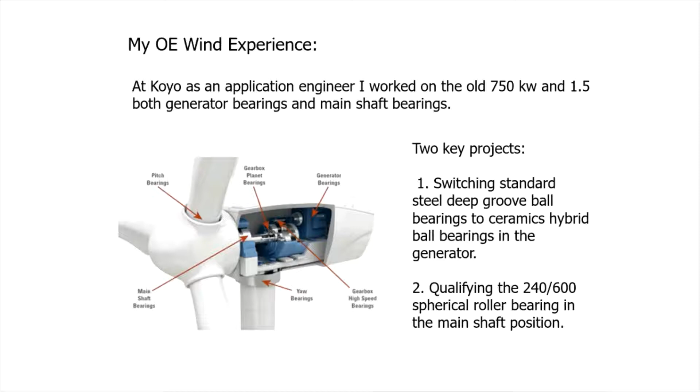Digging a little deeper with the ball bearing, it was kind of an interesting thing: when wind turbines first started, there wasn't a ton of them. Not a lot of people were paying attention. But as the number of turbines grew and the sizes grew, all of a sudden problems started to appear. Original equipment manufacturers needed to find a way to resolve these issues. Their objective was, of course, to get past their warranty period. In these turbines, we're having issues with the bearings from self-induced eddy currents, faulty wiring, so on and so forth, causing your bearings to not last as long as they were supposed to.

So I was assigned with GE, at the time it was Enron, to study the ceramic ball versus the ceramic coatings and standard bearings. Now, what's very interesting to me is today, all three versions are up in the air. Many times you'll find the best engineering solution, but it's not cost effective. So it gets kind of side railed and moved on to something different.

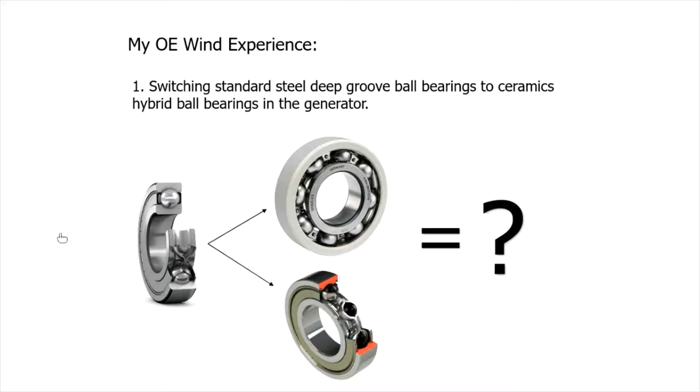Next one here was kind of a unique one for me, the 240/600 spherical roller bearing for the main shaft. This one was kind of neat. I got to do all the life testing and all the design project on this one. And once we had all that approved, I took a trip with GE over to Japan with their quality department and walked through the entire process. They wanted to be able to track a bearing component back to original material. So it's kind of interesting working a bearing backwards to the raw steel.

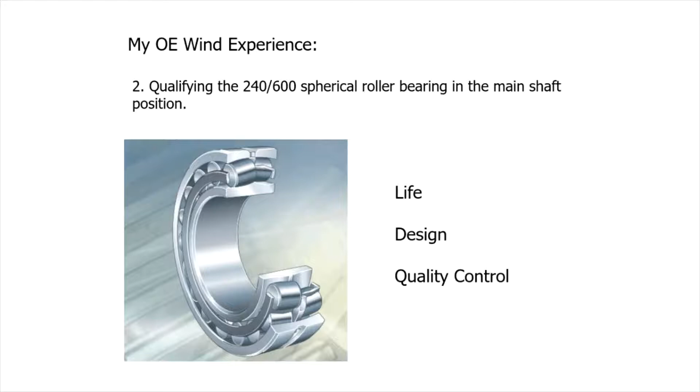So next slide. I know a lot of folks in the engineering world are motorheads, and their dream is to work for an automotive company. That's all good for those folks, I guess, but not for me. I was so happy to work for the industrial side. It allowed me to work with every type of bearing under the sun, and I got to work on so many cool applications and been all over the place.

I worked on things like spinning bikes. I worked in steel mills. This one right here is pretty cool. I worked on multiple axis robot arms used in special environments like vacuums, where I was dealing with really fancy materials like ceramics, special greases to keep away degassing and stuff like that, and of course wind turbines.

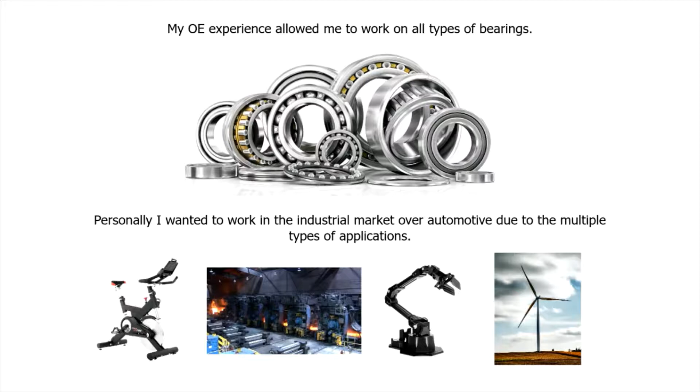As time moved on, I decided to move away from working for the OE, and I decided to work for an aftermarket company. Midpoint Bearing, that I work for today, they specialize in electric motors. And as time had gone on, electric motors are almost the exact same thing design-wise as a generator. So it was a very easy transition for us to move into doing business in the wind turbines.

Now, I actually have two roles at Midpoint. I do sales and I do engineering. But we'll skip the sales and just look at the engineering because that's probably my favorite part of my job. So about failure analysis: from my OE experience and working with manufacturers in the field, I found that many bearing manufacturers had the stance of finding the problem to be not my fault. That's fine, but it's not very helpful when you're searching for a root cause.

On the screen, you'll see a failure of a 240/700, if memory serves. That's a 700 millimeter bore, which is about 27 inches. These are difficult to move around, so when you have one of these failures, a lot of times you go to the bearing, as I did in this particular one. On the bottom side there with the red arrow, you see that we started to notice a few issues. We saw some sliding and we saw some thrust loading issues.

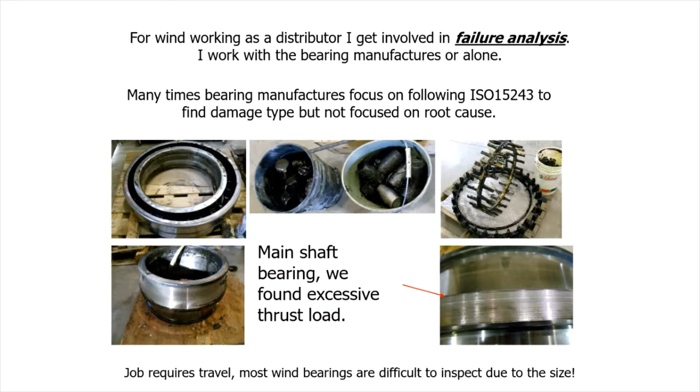To me, what's kind of interesting is, in my world, we're always dealing with what I call an aftermarket upgrade. On the OE side, once you pass warranty, everything's good, nothing bad about the OEs, but most wind turbines, they want them to last for 20 plus years. So we had to find a way to address these issues, and we call them aftermarket upgrades. So we work with the bearing manufacturers directly and come up with these upgrades.

In these particular issues, we identified the skidding, and to resolve that, we put in this Triondur coating on the rollers to avoid skidding, and for the axial load, we actually adjusted the contact angle on this side of the roller bearing to allow it to handle more thrust load. We have multiples of these up in the air right now, and they seem to be doing really well. So it's kind of neat to see success happen.

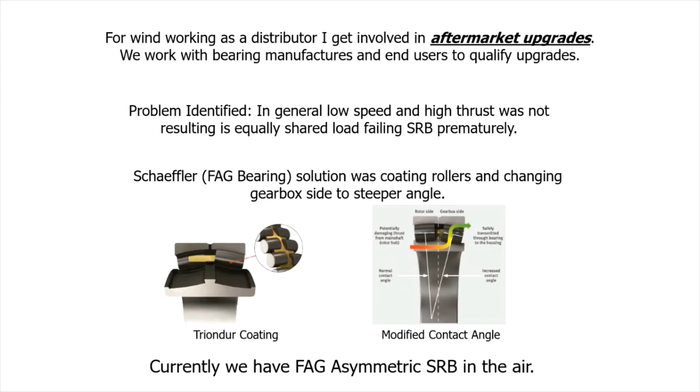Other type of issue that I run into is this was your pitch bearing motors. The customer thought they were having current issues, so they sent the bearings to me. I tore them apart and inspected them, and I found out that what they were having is actually a problem called radial preloading. So after bouncing around what we can do to fix this, we came up with a few different ideas, and we actually went with using the high temperature steel and Viton seals.

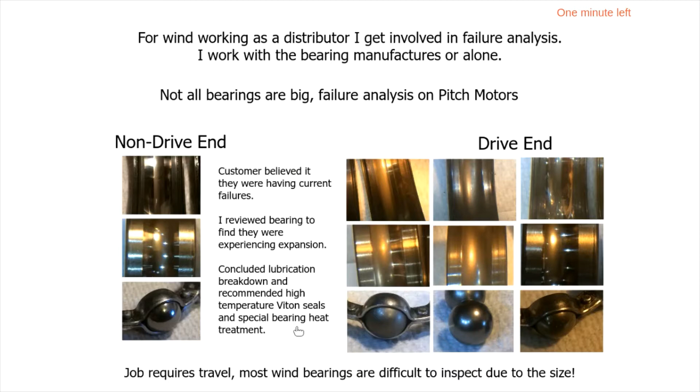Okay, 1 minute left, so go faster. I'm almost there, Jessica.

Another one that we had: a lot of times we'll run into really big ones. This is actually a 240/800, so a very large bearing. Customer thought they saw damage during routine maintenance. So they took this main shaft down along with the bearings. I flew down to Texas along with my Schaeffler field service guys, disassembled, which destroys the bearing, and we found absolutely no damage. So a lot of times we get stuck in situations that aren't easy to explain to the end user, that you just threw away a $40,000 bearing, plus who knows how much it costs per crane and all that kind of stuff.

So I love bearings. Jessica said it, I am the true bearing geek, and I'll be here for you to answer any questions you may have. All right, thank you.

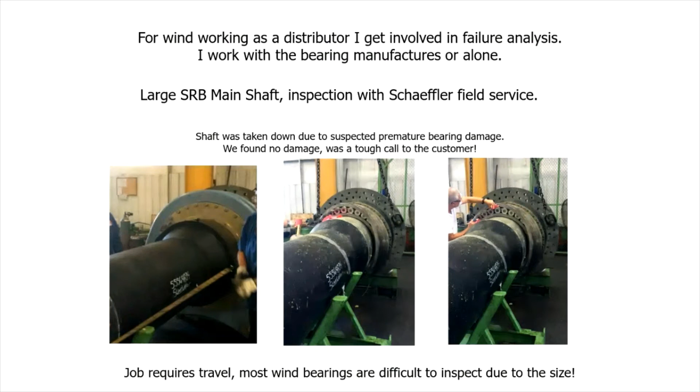Awesome. Thank you, Bob. That was great. I'm so glad you went into some of the technical aspects of your job and not just the standard, this is my education, that someone can just read. So thank you for that. Moving forward. No problem.